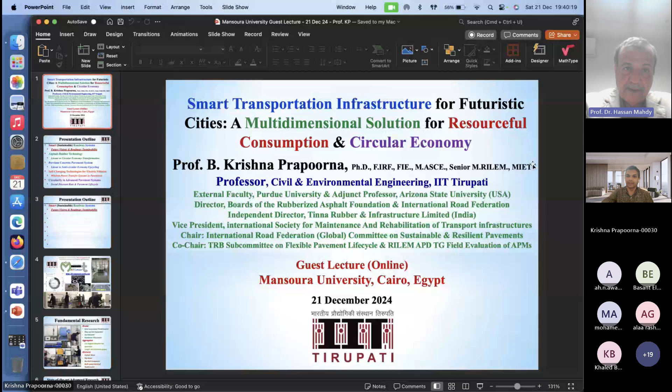So here is the title of the presentation, but then I thought I'll also give you a background about what I did. So I got my PhD from Arizona State in 2008, almost 16 years ago, and then moved to Sweden as a postdoc for about 2.5 years. And then I came back to the US, served as assistant director of the National Center of Excellence on Smart Materials and Infrastructure. That was fully funded by US EPA at that time, and then it became self-sufficient. Later, I even taught a few courses at Arizona State.

Then I moved back to India in 2012. I was with one of the oldest IITs in the country, with more than 15,000 students at one time. And then I got my promotion, tenured, and then moved to the current IIT, which is called IIT Tirupati. So this is one of the 23 IITs that we have. They're all sister IITs, all similar ranking and excellent facilities that we give to the students.

But I also have been associated with two other universities in the US, one Purdue as an external faculty. We have a large project with Purdue University, and then Arizona State as well, where I've been working as an adjunct professor. So there is a project that we have, and I'll explain how we have embarked upon it, and what we do with both of these universities in terms of transferring the technology and whatnot.

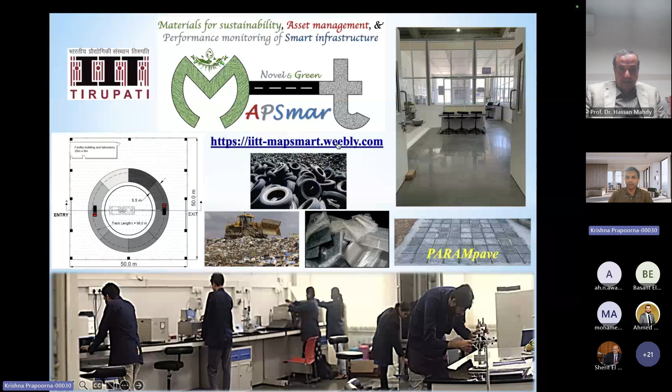As I told you, we do a lot of fundamental research on binder, aggregates, mixture design, balanced mix design concepts. We also do advanced research using the UTM, Universal Testing Machine, and I'm sure many universities in Egypt also have this system. We do a lot of work on performance monitoring and performance criteria development using advanced technologies such as SuperPave gyratory compactor, apart from the Marshall mix design that's been around for almost 100 years.

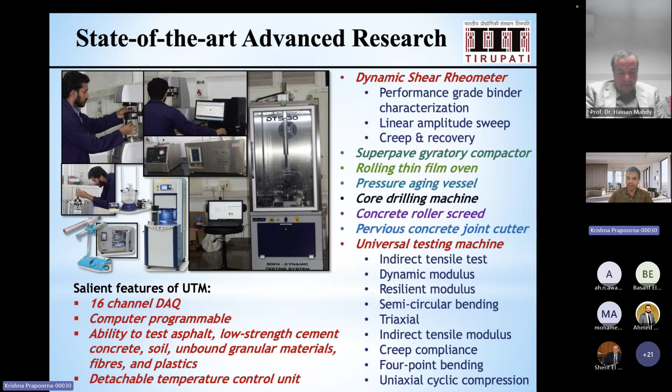So we have a machine that can do everything at one go. We have 2 machines of that kind.

Very soon we will have one more coming up. So this is the ongoing research activity. We are coming up with mechanistic pavement design for India, which includes vehicle pavement interaction with real field testing done on national highways in India, coming up with new vehicle damage factors, real truck traffic, and taking into account the loading pattern and the axle distribution.

So all of these we are doing. We recently received another project from the National Highways Authority of India, a Government of India subsidiary, where we are going to build asphalt rubber test sections across India. It's close to a $500,000 project that I'm championing across the country. We will come up with some specifications very soon for AR.

Apart from this, we also work on this warm mix asphalt additive that I'll explain later on. What we do here is reduce the production temperatures and lay down, especially at the plant. Whenever we talk about the fumes emitted at the plant, they're at very high temperatures, very high emission of energy, and the heat that is required. So we are trying to come up with new additives that can lower the temperatures.

Apart from this, we do a lot of work on pervious concrete, as I mentioned a while ago. We have very good collaboration with the state government where I belong, and we do a lot of work on their pavement assets. So not only building, but also managing their assets.

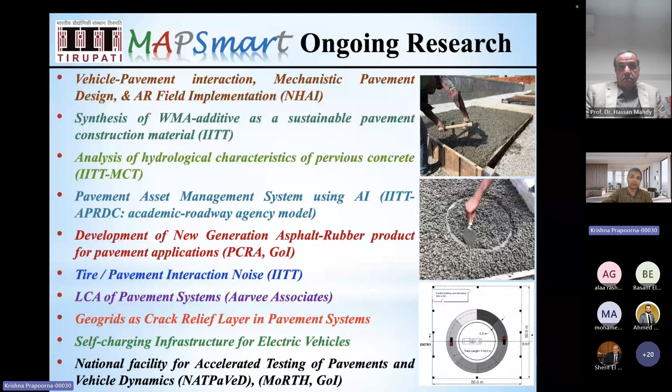And then, as I mentioned, we have an accelerated testing facility coming up on campus. It's a national facility for both pavements and vehicle dynamics. This is what it looks like - it's a circular track. It's now being constructed, so it will get inaugurated somewhere in May or June, very soon.

In fact, we have finished the groundwork, so the track is getting built. Once the track is built, then we will have the real pavement systems built, and then the trucks are purchased. We have 2 real trucks purchased from manufacturers. We have customized them - they'll be running fully loaded at about 18 to 24 tons load. So this is first of its kind in the world.

In fact, I say India, but in the world, because most accelerated testing facilities do a single tire or a dual tire, but we are now building real trucks, both real trucks that will run across for hours together. So we will be able to simulate about 10 years of aging within maybe 1 to 2 years. So that is real accelerated testing there.

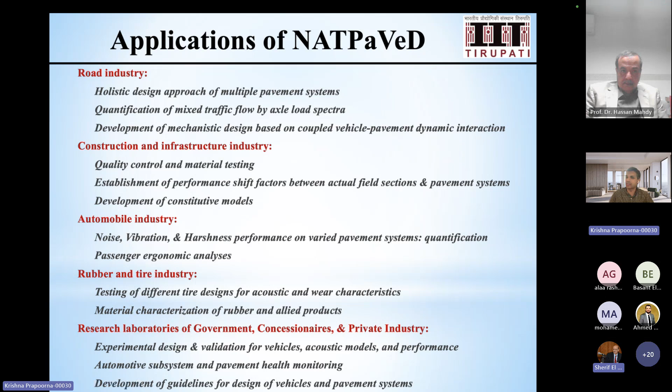That being said, we have a lot of good collaborations with the road industry, construction, infrastructure industry, automobile, because we're also trying to understand the noise, vibration, and harshness. Some of you, if you are from the mechanical engineering background, call this NVH, and that is a very important aspect when you talk about new vehicle manufacture. So we are also working on this to quantify the noise, vibration, harshness performance of these materials. And then again, rubber and tire industry - the tires used in various trucks - is another important aspect, and that is the application.

And then the other aspect which I mentioned with the government - we do a lot of work on this mechanistic roadway design integration with the sustainable development goals. When you talk about vehicle pavement interaction, very few studies in the world have actually taken into consideration the real truck traffic or real traffic, and then monitored the pavement for their distresses and evaluated.

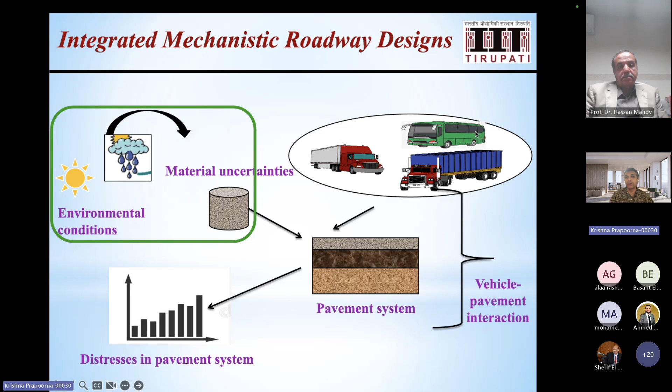So what we are doing right now is we are very strong in material characterization using state-of-the-art equipment. But one thing we are not able to mingle or co-mingle and correlate is the real truck traffic coming into the system, and the sustainability aspect coming with the serious damage occurring on the environment, the economy, human health. So we are now strong in this, but we also have to integrate that with the life cycle aspect - that is another module that I'll explain to you later on.

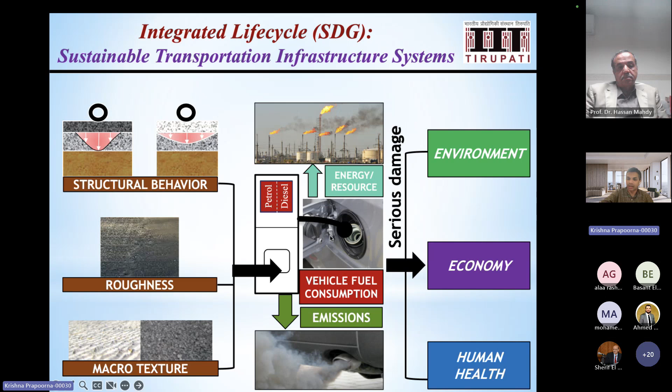When we talk about life cycle, some people talk about 6, 11, or 12 Rs: recycle, reduce, reuse, rethink, remanufacture, and many other things. We've done a lot of work on resource consumption and reduction of natural resources, such as new types of aggregates including tire derived aggregates or plastic modified rubber. We also do work on end-of-life automobiles and composite wastes. So this is our vision from the group, and I'm sure most of you have similar visions.

But if you talk about the current status of the world today, we do recover and recycle, that's called the linear economy, where government funds us to come up with material characterization and development of standards. But what we should be doing, and most countries are at the cusp of, is semi-circular, where we talk about remanufacture and reuse, recyclability, product development, and then come up with EPDs and LCA, life cycle assessment.

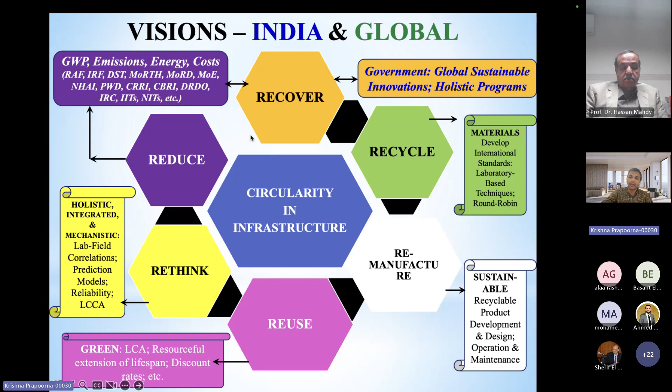But what we haven't been doing is a fully circular economy where we rethink and reduce the emissions and energies that get integrated with the materials aspect and product development. That's where this holistic approach of integration of mechanistic models with LCA comes into picture. That also brings us to the point where LCCA, life cycle cost assessment, gets nurtured. So that's the circularity that we envision through our group, both nationally and internationally.

So the first technical module, I'll not take much time, I'll just go through these maybe 10 minutes each. That gives us leverage to solicit questions from whatever you people can ask me, and if I know, I'll answer, and then we'll collaborate in the future.

The first module I thought I'll talk about is asphalt rubber technology, and it's been very close to my heart because I've been working on this for 20 years now, and I'm also the asphalt rubber ambassador for India through the rubberized asphalt rubber conference group. It has been organizing conferences across the world. It started in 2000 in Portugal, and the next conference will also be in Portugal, 2025 in Lisbon, the 25th year anniversary.

So please feel free to contact me, and we will put you on to the right people. Please also encourage yourself to submit some good papers on rubberized asphalt or asphalt rubber, use of rubber crumbs in asphalt pavements. So that's moving from linear to circular economy.

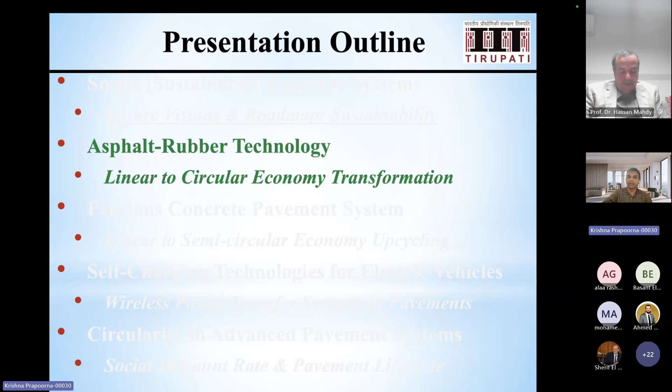How is it transformed? I'll explain this very quickly. If you talk about asphalt rubber, the definition from ASTM, the American Society for Testing and Materials International, very clearly says that when you blend at least 15% rubber with asphalt cement, only then is that binder called asphalt rubber. Anything less than 15% is not called asphalt rubber. Reason being, the swelling of rubber particles takes place very much only beyond 15%.

People have tried 20%, they've tried 30%, and it also gets saturated about 20-25%. That's a magic number. So if you go to Arizona or California in the US, they've also used 20% rubber very much. Florida and Texas, all of these states have used it.

There is another terminology called terminal blend, which is rubberized asphalt, where they blend rubber and replace aggregates with rubber tire crumbs. Please don't get confused: one is asphalt rubber, where you use crumbs with asphalt cement and blend them, that is the wet process, called asphalt rubber. The other is rubberized asphalt, or the terminal blend, where they blend rubber crumbs with asphalt and aggregates, so replacement of some aggregates with rubber. So these are the two important aspects, one is the wet process, the other is the dry process.

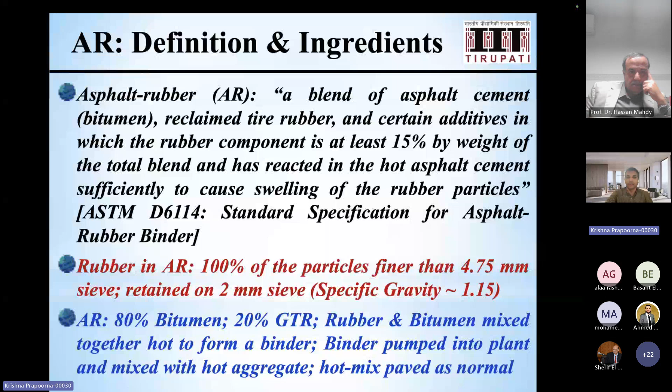That's how these both gel very well with each other. So 80% bitumen or asphalt cement with 20% ground tire rubber is what we call asphalt rubber. They are blended to form a binder and pumped to prepare mixtures. No sophistication required, it's the same plant. I'm sure some of you are familiar with this.

So what are the applications of asphalt rubber technology? One, as a friction course, and as Dr. Sherif rightly mentioned, it was the key thing. That's how the quiet pavement program started way back in 2003 in the US, where they surfaced the friction course on the Portland cement concrete base course.

This is one of the best, or I would say most successful blends, a composite structure where you have an asphalt rubber friction course about half to one inch, which is only about 25 millimeters. It's a really thin friction course resting on the Portland cement concrete, a very strong structural layer.

So that gives us a very good strong base and a friction course that helps drain down the water, and that gives you very good skid resistance, very good noise reducing capabilities, and also engineering use of old tires, because you're using about 15,000 tires per lane kilometer. That's a very good circular economy concept - waste to wealth, that's what we call it.

Apart from these, it's also used in asphalt by itself. So there's a new or existing HMA, hot mix asphalt. On top of that, you provide a gap graded asphalt rubber, a strong structural layer, and then a friction course on top of that. So you see here open, gap, and dense graded structure. Some of you might be familiar with this.

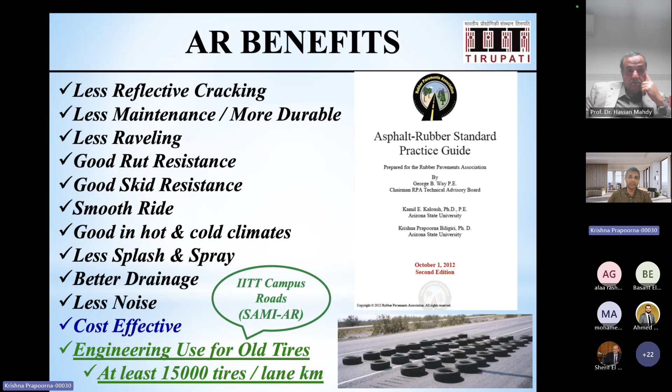We have not seen even one crack in the last 5 years. So we designed ourselves and placed it, did good quality control on these. That gave us good benefit there.

We also talk about LCA of this product, life cycle assessment. I'll explain what LCA is later on. But when we say LCA, that means we are looking at how well this product compares with the other products that are there - the kg CO2 emissions per lane kilometer per year. That is what we look at, the emissions and the energy required to build these.

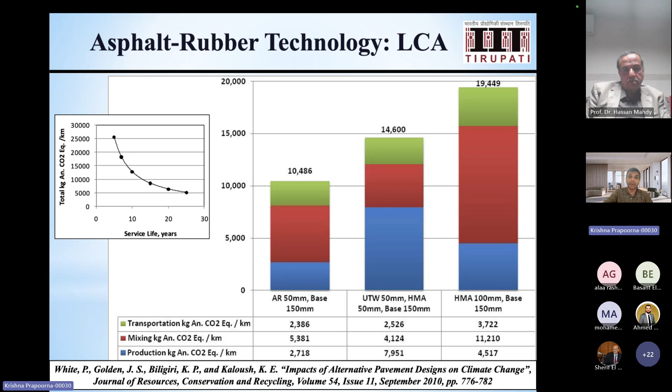One, Veena, she actually worked on a new gap graded mixture design, fully suiting Indian conditions. There are umpteen number of gap graded mix designs across the world, but we wanted to do it for Indian traffic conditions, Indian demographic conditions, Indian geographic and soil characteristics. I encourage you people also to do this. Please come up with your own designs, because if you bring in standards from elsewhere, they may not suit your conditions, especially if you have very high traffic, or the temperature conditions are different.

The other aspect is we also came up with new technology for asphalt rubber, where people have always talked about the storage stability of these products. Can we use it beyond 2 hours of manufacture of asphalt rubber? Today, no, because it gets settled down, so storage issues are there. So we came up with a new product called the recycled or modified asphalt rubber, with various types of industrial wastes and nanotechnology. I'll explain that to you later on.

If you want to read more about this, in one small project with the Government of India, Department of Science and Technology, we came up with mix design practices for asphalt rubber, developed in lines with globally accepted superpave. The first project in the world using superpave for asphalt rubber gap mixes was us. We established our own protocol.

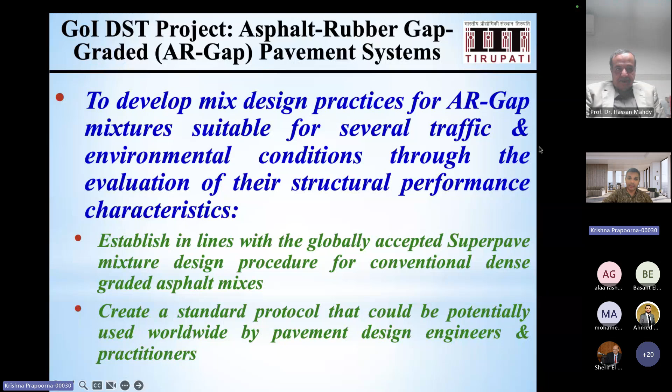Here is the design parameter selection for the entire mixture. We had 20% rubber passing 300 micron sieve, and we used superpave mix design, unlike the Marshall mix design that is conventionally used. The air voids that you see here, you can come up with your own design. When I say this is the design, this is not the end. You can also come up with your own novel design, based on the balanced mix design as well, coming up with performance criteria, including rutting and cracking with respect to aggregate gradation, binder concepts, volumetrics, and many other things.

This is a published document in Construction and Building Materials, a very highly impacted journal.

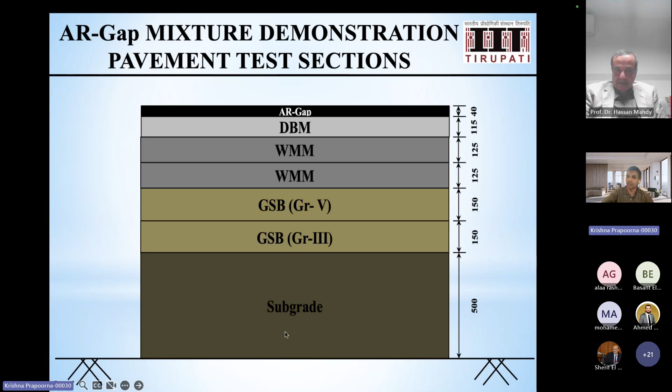We also did a demonstration section, an actual pavement section, where we paved the surface wearing course, 40 millimeters, about 1 to 1.2 inches, on top of the existing sections. There were many layers below: dense graded, wet mix macadam, granular subbase and subgrade existing there. We didn't touch any of those. We just put a small, thin section, constructed way back in 2017. It lasted for 4 years with no cracks.

Later on, the state highway that we paved became a national highway. It was widened to include about 4 to 6 lanes. So they had to repave it, but it was functioning very well.

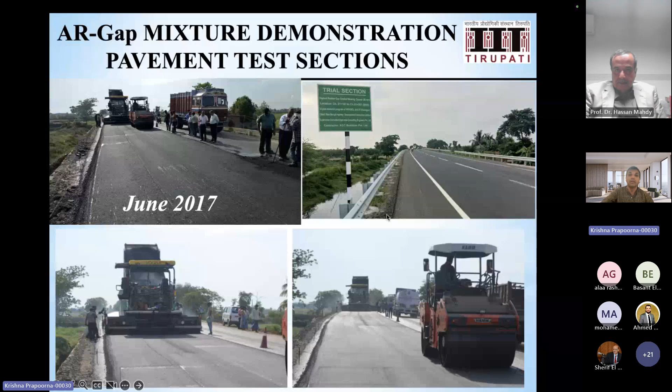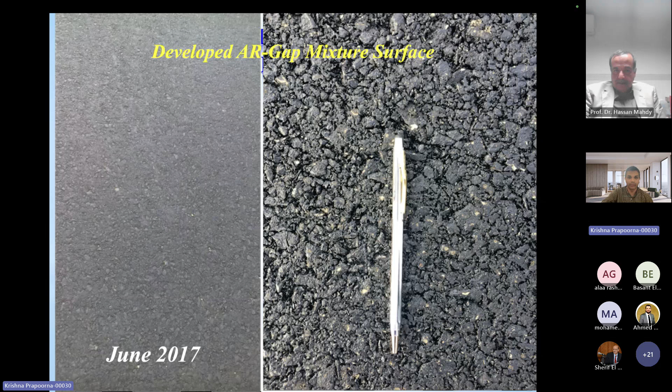4 publications came out of this in 4 different journals, including the TRR, Transportation Research Record, or the RMPD, ASTM, and Construction Materials. In 2020, they actually repaved the entire section.

The other aspect I was mentioning, we came up with this modified asphalt rubber with several nanotechnologies and industrial waste products. What we did to start with is we came up with montmorillonite. Some of you who are geotechnical engineers might be very familiar with this. It's a nano clay, very much abundantly available on Earth's crust. You take that, obtain it from the soil subgrade, and start using it to create modified asphalt rubber.

How do we do this? There is a process, it's a published document, I won't go into detail, but what we do is pulverize the asphalt materials that are activated. We have these rubber crumbs that are blended with asphalt cement at varying dosages. Here you see there's a base binder and then crumb rubber. Based on the ASTM, about 20% is what they are stating for an asphalt rubber.

We even went to about 46%. In fact, recently one of the papers we published had about 60% rubber content. So you can go up to about 60% rubber now instead of just 20%. That means you're now getting into the circular economy concept.

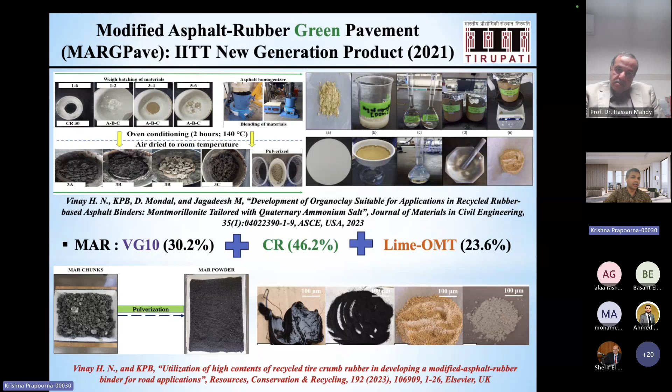And now we've also gone into another stage where we're replacing the montmorillonite with fly ash, pond ash, ground granulated blast furnace slag, and many other industrial wastes, including composite waste.

So what we do here is very simple. If you go to the plant, you don't have to change any of the structures there, nothing required. It's simply a dry process where you have the MAR, that's our product. You simply dump it into the pug mill in varying proportions, and you still run the other processes as they are. So you have your asphalt cement coming into the pug mill, the aggregates coming in, and the new product being blended with the asphalt cement and aggregates, reducing the fine aggregates with MAR. It's still a great product because we've seen that it functions much better than conventional asphalt rubber in terms of fatigue resistance, rut resistance, and moisture resistance.

It's a published document, please visit this journal and download it. We call this MARGPave, modified asphalt rubber green pavement. We used nano clay and industrial products there. It was a full PhD project from one of my students in the past.

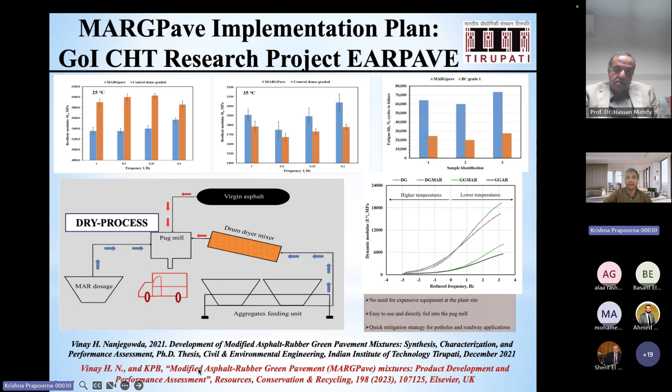We also did a lot of work on LCA, life cycle assessment. Here we use something called attributional allocation at point of substitution. In simple words, how it works: you have three different things—one is asphalt cement, the other is aggregates, and the other is rubber. We combine all of these and come up with what we call the specified temperature and time concept, applied to the binder and aggregates.

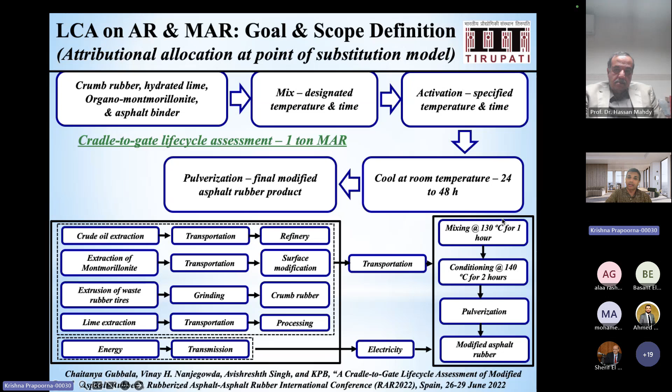We activate that, and then cool it at room temperature, as I mentioned, to get the pulverized product. We take this pulverized product to the plant. We also account for montmorillonite extraction separately, and transportation separately, before it goes to the plant. We do an attributional allocation, which means we don't combine any of these—we talk in silos—and finally the product is compared against what we call the life cycle inventory.

We have primary data coming from material suppliers, such as asphalt cement and aggregates, and so forth. For products not already built, you have to depend on secondary data, especially strong databases like EcoInvent that already exist. That's the literature. And then we have hydrated lime, which already exists—I'm sure it's there in Egypt as well. Then we calculate the material proportioning.

We have done that here. This adds up to 100%, right? And then what we do, next stage is calculate the energy.

So if you want to talk about the LCA, you need a functional unit. What is this functional unit? You have to target an N amount of material to compare this with the conventional product. So what we did here, we compared 1 ton of modified asphalt rubber versus 1 ton of asphalt rubber product, and then 1 ton of the conventional. So that is the functional unit per lane kilometer. You need to specify this for an LCA to run. Functional unit is very important apart from the life cycle inventory.

So you need to create a life cycle inventory using your primary data source. And if you don't have some of the databases, please rely on a very reliable database such as EcoInvent or some other. Run it through a software, or you can create your own LCA package, which we did, in fact. And we calculate the energy coming out of these.

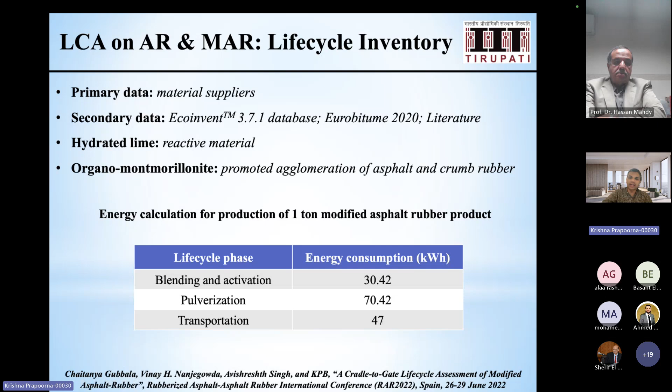So basically what happens here is when you run it through a software, it'll actually ask for all of these. Now, let's say you create your own LCA package, then you'll basically see that you don't need to even include the transportation sector, right? So you can run it through various other types of assessment methods. In fact, we use midpoint impact here, but there are other types such as the endpoint that also can be used. Only make sure that you know the endpoint as well.

In our case, we did not know that, obviously, because we were looking at the cradle to gate, or what we call the production to plant level. If you want to compare this with the operation and exhaust phase, then you'll have to be using the endpoint, which we couldn't do because of our own limitations of still producing the product.

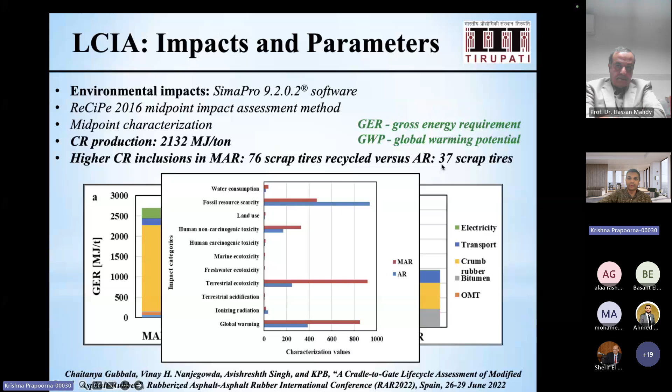So what we have been able to clearly state with our studies, we have found this, we have concluded, inferred that recycling of rubber definitely yields in a very sustainable development of the infrastructure.

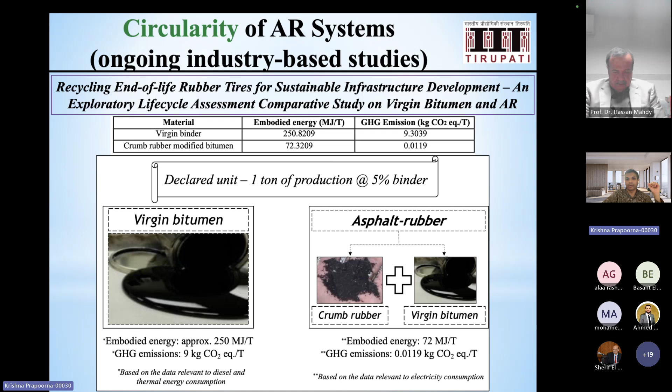Okay, the next module that I thought I'll talk to you is the pervious concrete. Again, this particular product has been there for almost 40 years. Various countries have used this, New Zealand, Australia, Canada, US. But what we thought, we'll develop our own product for India. So when I came back to India in 2012, we said we will embark upon a project called Pervious Concrete for Future Cities.

This is a product that could be used to ameliorate the problems that are coming from the infrastructure. For example, when you have rapidly developing cities, I'm sure Cairo is also rapidly developing with urbanized setup, what happens there is with pavements, it becomes impermeable. So there's no way that water gets percolated through, to the groundwater. That means you also have a little bit of groundwater recharge getting reduced. Over time, quality of life also gets reduced.

So there are two aspects that comes with this. One is the change in the urban hydrological aspect, where you don't have good groundwater recharge. The other is the temperature increase. So if there is an impermeable structure, there is also this heat that develops within the city. And I'm sure you'll experience this with respect to the rural setup.

So when you go out of the city, you'll see that there is about 2 to 5 or maybe even 10 degrees Celsius decrease of temperature with respect to the city, right? And that's called the urban heat island.

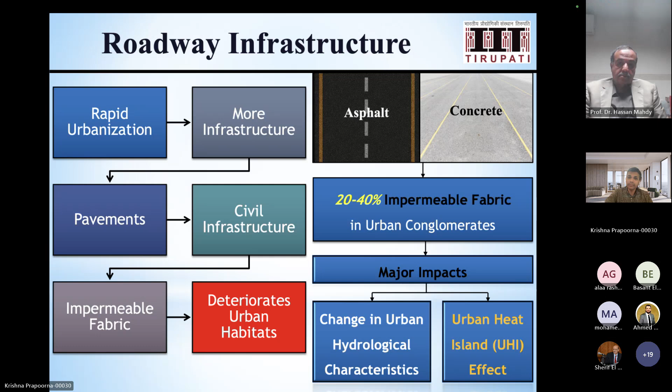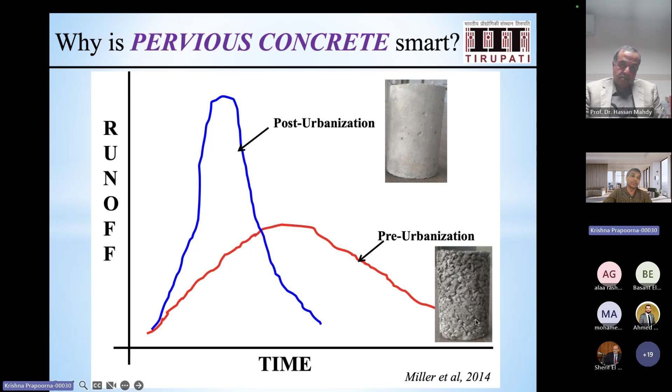So if you want to target both of these at the same time, you'll have to create something called the sustainable urban habitat, or what we call a pre-urbanized setup even after construction of the roads. Better recharge comes with pervious ground, reduced recharge with built up area. So what we should be doing is target a pre-urbanized setup with good green products such as pervious concrete. Pervious, when I say, means permeable in nature, and that gives you a pre-urbanized setup, meaning you have very good groundwater recharge and also reduces the urban heat island effects.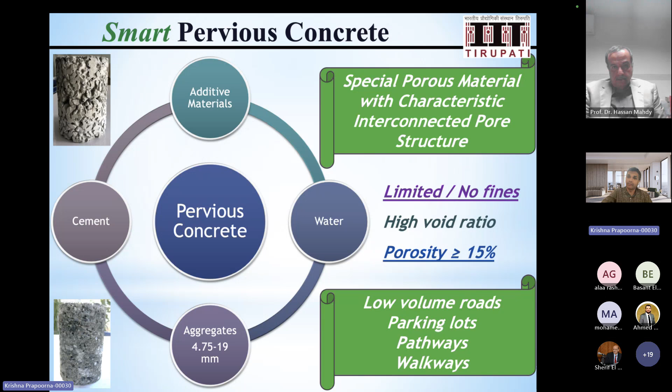So what is pervious concrete? In a nutshell, it is simply regular concrete, except that you have very less amount of fines or no fines at all, absolutely no fines. Very high void ratio, very high porosity, about 15 to 20%, maybe 40% sometimes. Same cement, water and aggregates that you use. You might start using additive materials such as supplementary cementitious materials, example fly ash or silica fume, or maybe GGBFS, rubber granules to increase the strength of these materials, because it has very high void ratio.

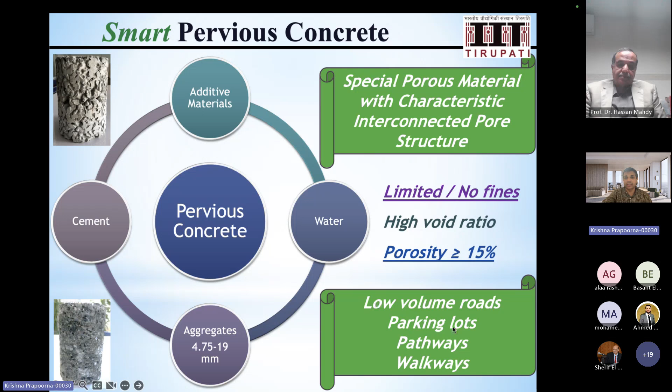You can also expect that these materials are low strength because they also have interconnected pore structure. So what we have seen is this can be applied in low volume roads, parking lots, pathways, and walkways.

So that question always remains - how do we mitigate that? So if you have a composite structure, you prepare this in 3 or 4 lifts, you can start removing the top layer and then replace it with another layer over time. We have seen that these materials get clogged only once in 3 to 5 years, not less than that. So if you can prepare a top section with pervious concrete, and also below layers with pervious concrete, you can start using double or multiple layers. Only the top layer will be removed every 3 or 4 years as a maintenance strategy. So that is another way of dealing with clogging.

So here is one state-of-the-art review paper on pervious concrete. Please feel free to visit this. Another paper also on pervious concrete that talked about clogging effects.

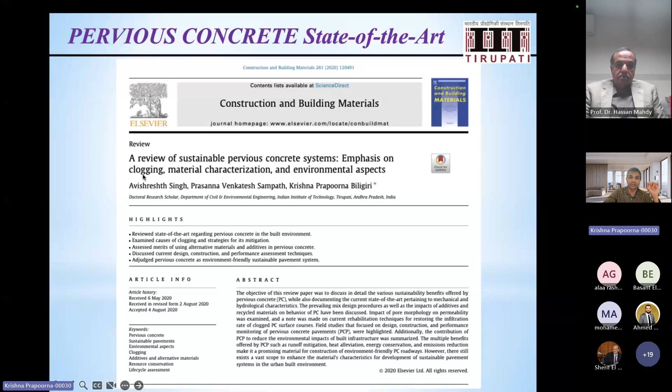So the previous paper had my student here. He's now a professor in one of the other IITs. Avishreshth was my previous student, one PhD. Now he is in Netherlands working as a postdoc in TU Delft. Both of them worked on this for the last 10 years.

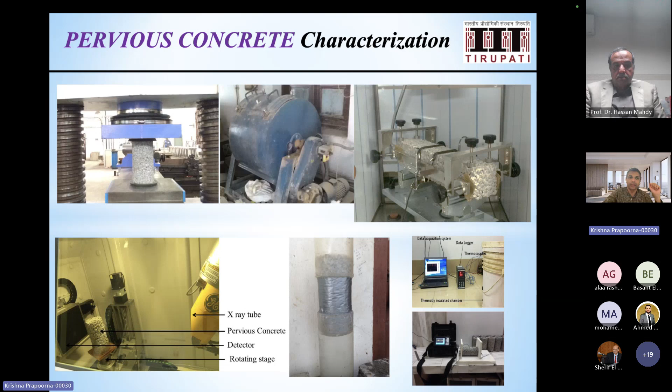So we have done a lot of work on this compressive strength. In fact, we did a lot of work on flexural stiffness. We have done work on thermophysical properties such as specific heat capacity, thermal conductivity, X-ray microtomography, permeability, and many other things. In fact, we've also done abrasion resistance to understand the raveling aspect.

Okay, so here is a glimpse of what all we did after we came up with the product. So we built 3 different sections: one low volume roads, parking lot, a real road with 30 slabs, and then another parking lot on campus IIT Tirupati. All of these 3 sections still exist even after about 6 to 8 years now.

Okay, so what we did, you see here, the mix design composed of cement, aggregates, and then super plasticizer to make sure that there is good workability. So the compressive strength varied between 10 and about 20 MPa. So M10 to M20 concrete is what we targeted for low volume roads. But the infiltration, or what we call the permeability, was very high. If you talk about these numbers, they can be translated to about 70,000 millimeter per hour. That's the permeability that you get with these kinds of products, but they recharge the groundwater very well. They are also very strong for low volume roads - you can run even a JCB on these.

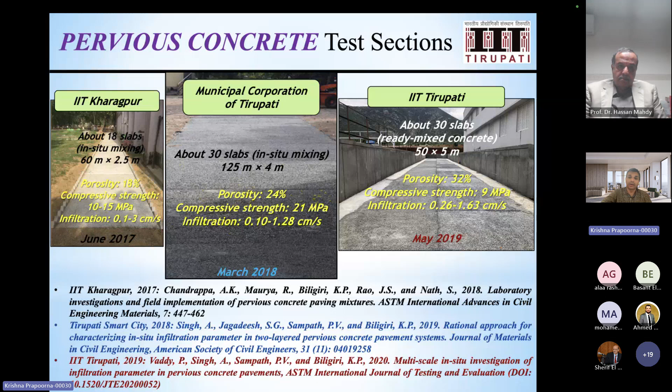In the next stage, people started to question us. Oh yes, it gets clogged, but it cannot be used as a high volume or medium volume road. So what do we do? So we came up with new technology, what we call the PARAMpave.

It's a pervious all road class, all weather, multi-layered paver block. So these are paver blocks, 1 foot by 1 foot, so 300 millimeter by 300 millimeter.

So what we did here, we created 2 holes in a concrete block. It could be M70, M50, whatever you want. If you want M50, you manufacture the base with concrete and then impregnate this small portion with pervious concrete. So here, this is a 90 millimeter height concrete block that you create using a mold, a square mold.

Impregnate this groove with pervious concrete, and these holes also are filled with pervious concrete. That is something you want to be aware of.

Now if you ask me, can we have more than 2 holes? Well, 2 holes are sufficient to ensure good permeability. But lately, my other students have started working on different designs of holes, maybe 3 instead of 2, or 4, or different types of designs. We have also worked on numerical modeling and come up with different designs which we can share with you in the next 6 or 7 months. But overall, you need to create a base with regular conventional concrete and impregnate that with pervious concrete.

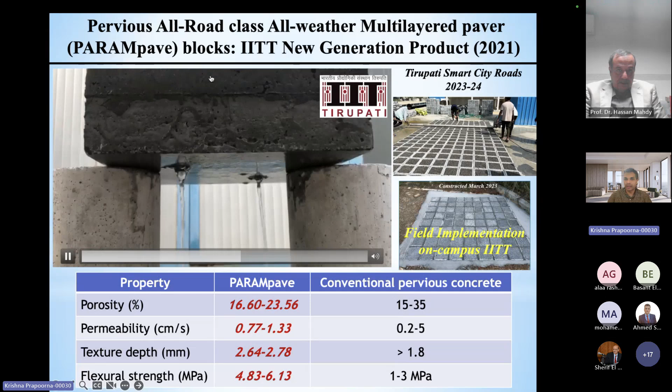We get very good porosity, no compromise on that, anywhere between 16 and 25%, very similar to conventional pervious concrete. The other advantage we got was the flexural strength increased by about 3-fold. Why is that? Because this pervious concrete doesn't have a concrete base, it's regular pervious concrete.

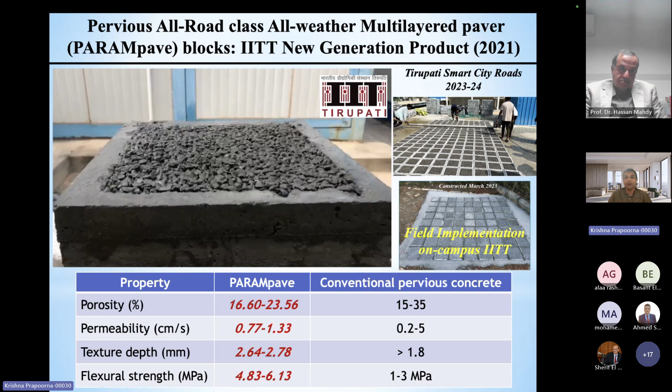It's a slab, 500 millimeter by 500 millimeter, or maybe a 2.5 by 3.5 meter slab that you regularly construct. You construct a concrete section regularly, no, you don't want to do that. You want to create a pervious concrete block, that's called the PARAMpave. So we get very good flexural strength, about 4 to 6 megapascal beyond what the ACI, the American Concrete Institute, prescribes.

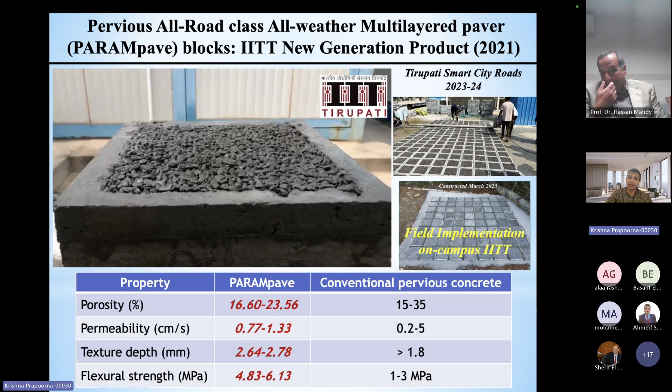So what we did recently, we constructed 850 meters of smart city roads with our blocks, as you see here. And we also calculated the cost savings coming up with our paver block, about 10% cost savings per block. You save about 5 units, I'm putting it in Indian rupees, but you can calculate that in dollars or your currency. It's not very far, about 10% cost savings.

And also it's lighter, about 2 kilograms lighter than the conventional concrete block. The costs have been calculated based on linear lane kilometer for a 3.5 meter wide section. So you're looking at about 200,000 Indian rupees saving per lane kilometer. Approximately, if I calculate that, about $3,000 a lane kilometer in savings. That's substantial.

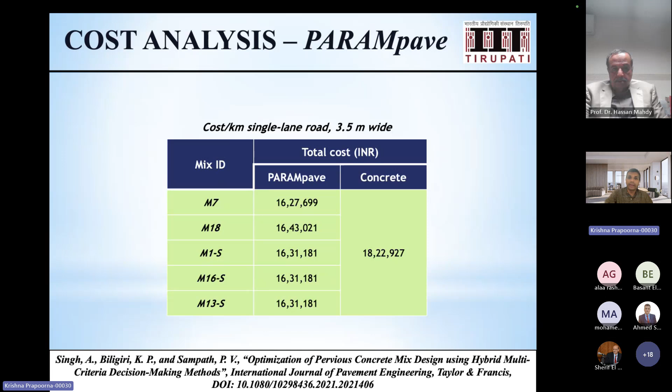Really big savings coming up with these products. It's again a published document in the International Journal of Pavement Engineering. And then I'll share with you one small video of how we did this construction. Let me explain this, maybe with the audio.

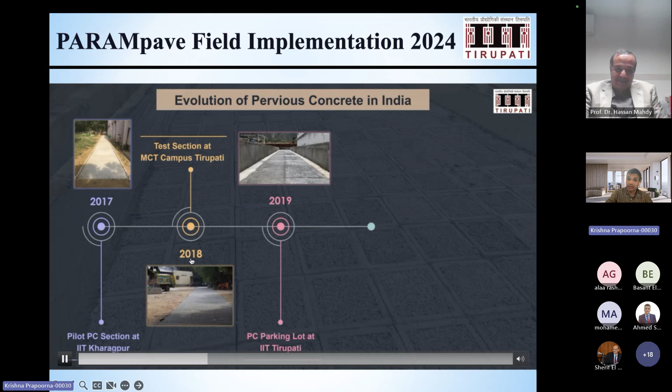So this is my office. I'll just move this and explain to you. I had one of my PhD students and one of my master's students working on this. So we had 4 sections built, one in 2017, one in 2018, one in 2019, and then recently in 2023, just last year, early this year as well.

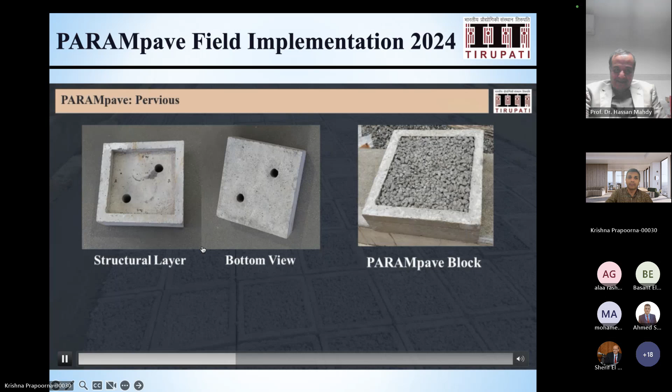So what we did, again, structural layer, bottom view, block with impregnated with pervious concrete. So this is the structural layer, and this is the functional layer with pervious concrete. So we did a lot of survey on this. We prepared the subgrade and a base course with a granular base course there.

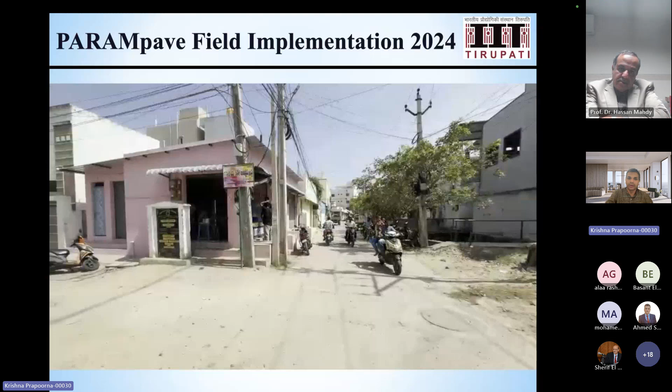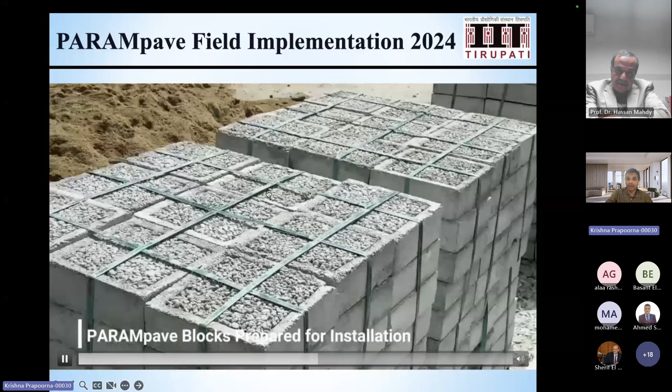It was continuously with traffic, and then we compacted the base layer with a roller. We had about 18,000 slabs that we created in our yard. We brought it to the site and started simple laying, one next to the other, as simple as that. They all get locked with each other.

Our contractor was very happy because we could finish the entire thing in one day. And then you see water being splashed, no water remains on the surface.

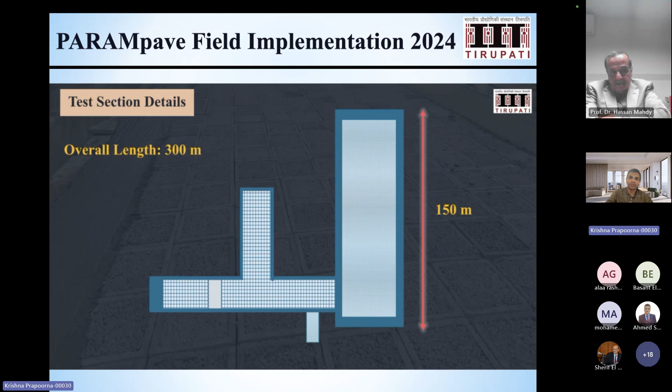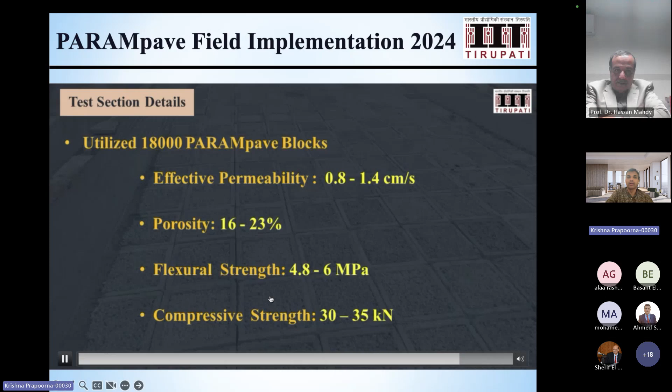So you can see here all kinds of traffic run - a 300-meter first section, and then another 550-meter section later, so 850-meter total. Here is the texture - we had 18,000 slabs, 0.8 to 1.4 centimeter per second permeability, very high porosity, very high flexural strength, very high compressive strength, about M35, M40.

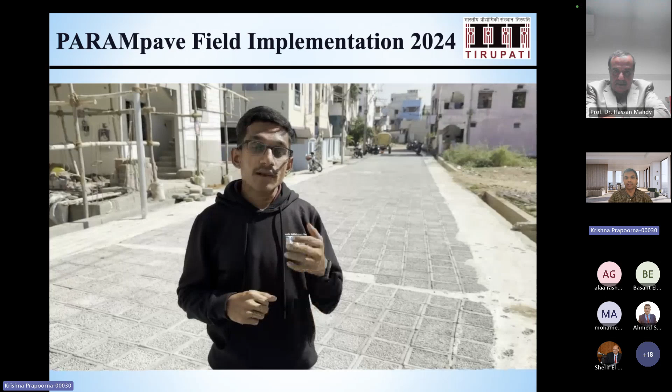We also instrumented these sections with thermocouples. We are now monitoring these sections for their thermophysical properties. This is the laboratory permeability apparatus that we created - there's no ASTM standard, so we had to do this ourselves.

We also had the municipal corporation helping us - they supported the entire project and we spent quite a bit on it. If you ask me, the cost savings are about 50 units per block, including construction. We only spent very little on the construction aspect because the blocks were very cheap.

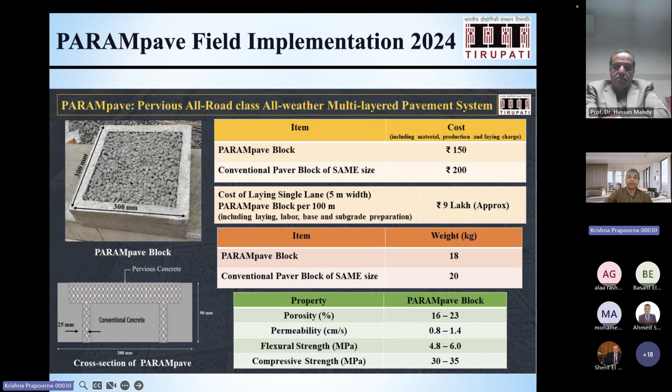Here is, in a nutshell, what it does. We did a lot of work on the life cycle, from material extraction to end of life. The life cycle includes the raw material extraction phase, material processing, and third, the product development phase - that's much more important than anything else. Then the product use phase, where you monitor performance, see if you need rehabilitation or routine and preventive maintenance, overlays, and so on. Once the design life is complete, that is called the end of life.

We might even be able to reuse that. In a linear economy, at end of life we cannot reuse. In a semicircular economy, we don't need maintenance but can possibly use the structure again. In a fully circular economy, every stage can be used - that is where we should be leading to, right?

So, waste to wealth - we did a comparative life cycle assessment study. We calculated the embodied energy, kg CO2 equivalent, and also the capital cost. We used something called cradle to gate, where we manufacture and leave it at the plant level or maybe at the field level.

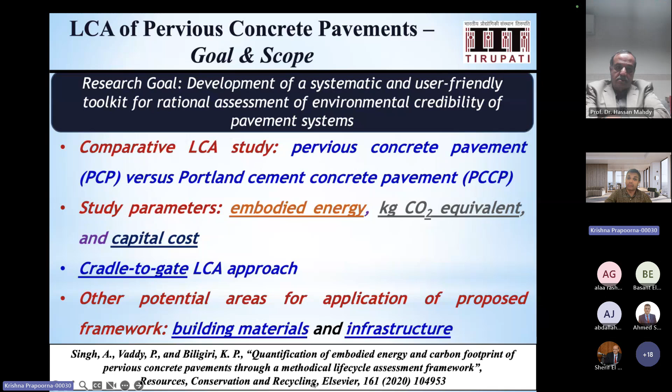This kind of study can be expanded even to other structures - don't get me wrong, it's not only for pavements, but for any structure including buildings, bridges, etc. You can use our framework - it's a published document. We quantified the embodied energy for pavements; it's published in the Resources Conservation Recycling Journal. Please visit this, and if you don't get it, let me know - I'll share it with you. The framework was developed by us in simple MS Excel; we didn't have to depend on licensed software.

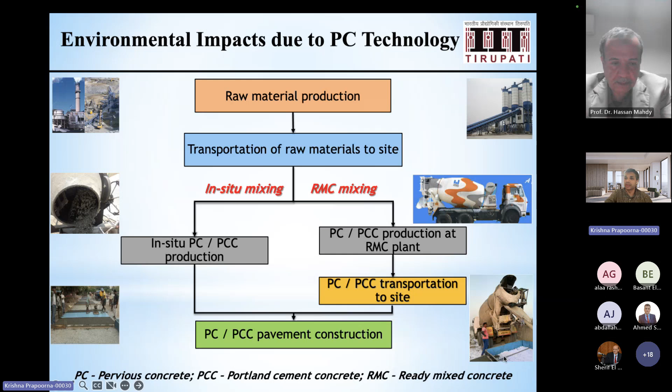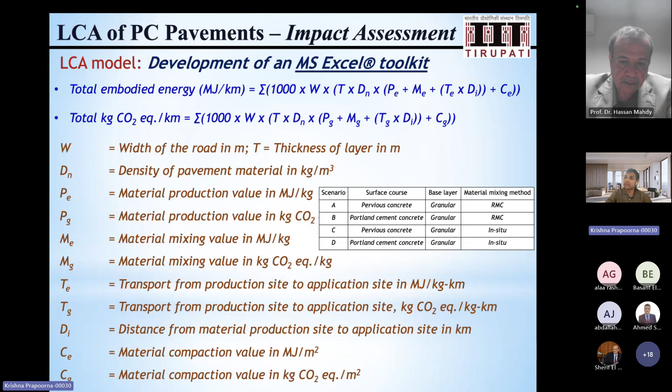We did an environmental impact study between in situ preparation versus RMC, ready mixed concrete. We found that with the models we developed using MS Excel for embodied energy and kg CO2, we can now look at the materials aspect, production, transport, and also end of life. It's a very comprehensive toolkit we developed, comparing between different types of materials.

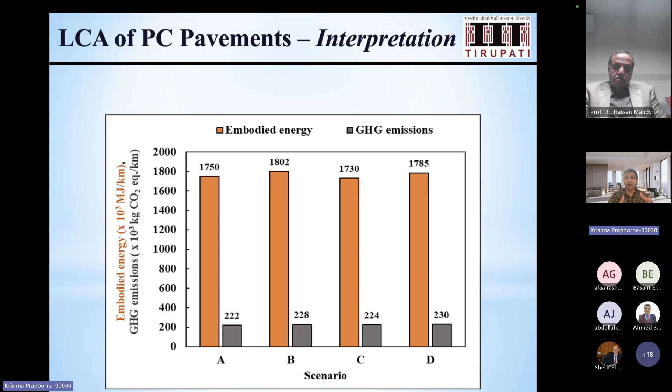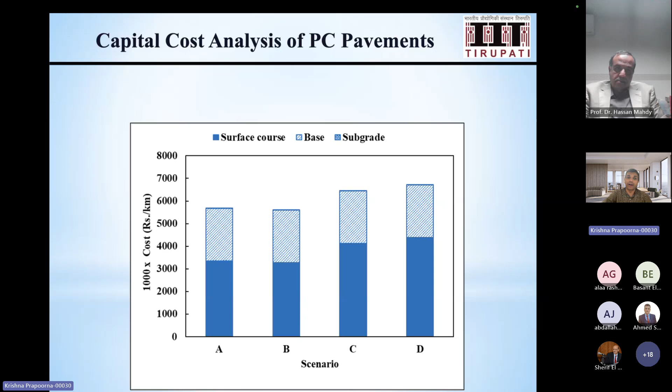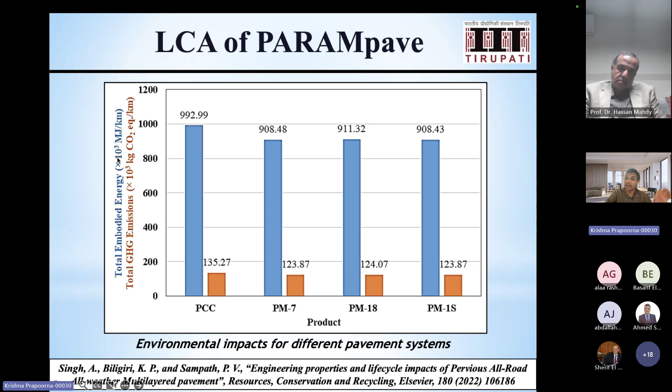We've also done this with respect to regular cement concrete - this is 10 power 3, so make sure it's 90 times 10 power 3. That's the reduction you get, substantial. So high strength with our new product, less material requirement, less energy, less emission, lighter, and also cheaper.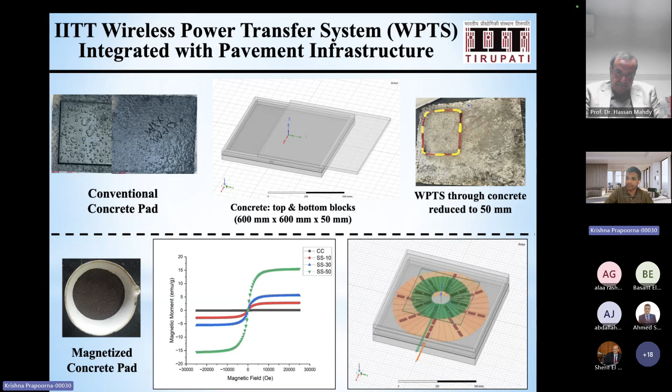We've also calculated the power efficiency of these coils. We see that if you can magnetize this concrete with, for example, steel slag - this is the product we are developing right now, steel slag concrete, about 50% replacement of cement with steel slag - what we can expect is a very high magnetic moment.

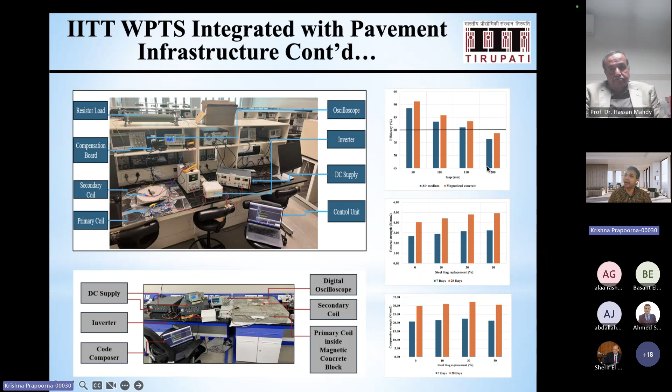This is our lab setup. We have now calculated the efficiency to be about 85 to 90% higher than regular conventional concrete. So what we did, I'll show you now a video.

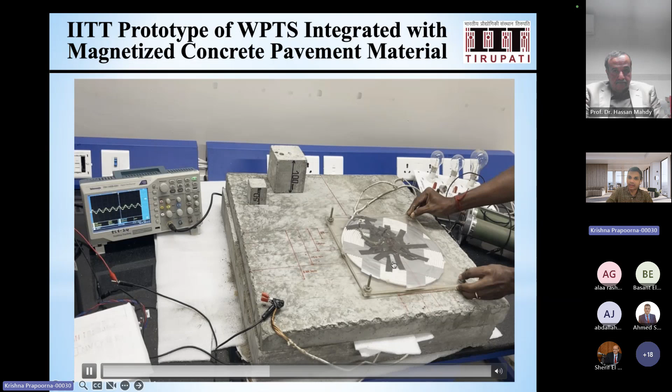So if you want to create a 50 millimeter slab here, and then embed these slabs with primary coil - this is the secondary coil within your electric vehicle. Now I'm going to move it up. You see here, it can go up to about 200 millimeter distance from the coil.

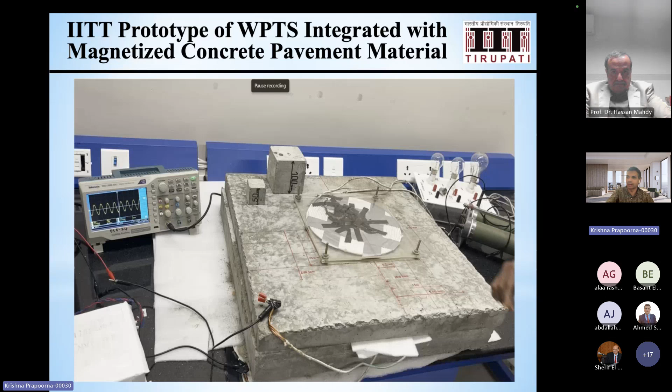So if you have an electric vehicle that has a clearance of 150 to 200 millimeter, your primary coil will start charging your secondary coil embedded within your electric vehicle. So it's a self-charging infrastructure - you don't need a separate infrastructure. You can have your roads dynamically charged. So that is what we are doing.

We will be having our test section built within the next week. In fact, we have got clearances, so we will be doing that very quickly.

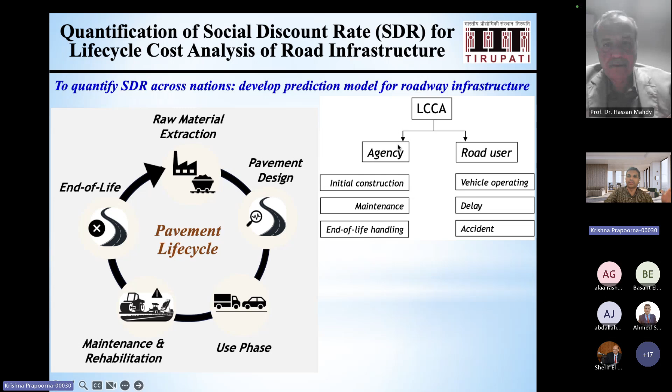Now, if you talk about life cycle cost assessment, that brings in other aspects such as construction, maintenance, vehicle operating costs, delay and accident. So there are two aspects here: one is the agency cost that takes care of construction, the other is the road user cost that takes care of the operation phase.

Now, if you combine both of these, you get something called the present value over the design life. So what happens in 10 years, we calculate today - that is called the present worth factor. That's the current value of the entire system that remains for 10 to 12, or maybe 25 years, and we calculate the life cycle cost at present for the future.

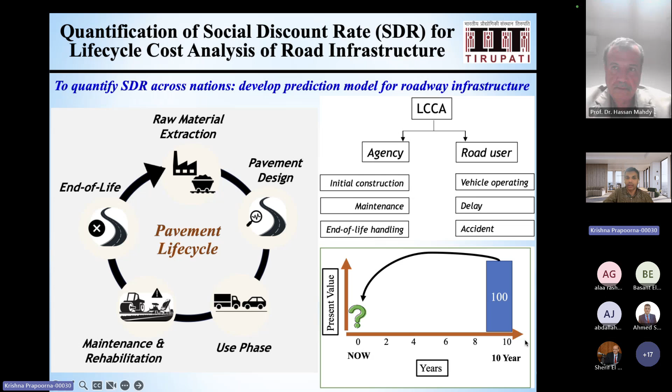And that brings in a new concept: social discount rate. This particular social discount rate has a definition - a very tricky definition, but we can simplify it by saying that if you want to bring down your future costs to present value, that's called discount rate. But if you want to calculate the social discount rate, you'll have to come up with socio-economic factors, social factors, and economical factors, which means your perceptions have to change.

That if I invest today on a larger pavement project at a network level, I will be able to reap the benefits of cost savings over its design life. So your perception should be that I should have a long-term vision of cost savings today - don't look at the myopic vision.

When I say don't look at what happens today, I will only fix it now but leave it at a later stage to be rehabilitated - that cannot work in a social discount rate. So I should be discounting it - that's what discounting is. I should be looking at the cost perception for today's savings. So we did a small work with conventional discount rate for 3 different countries.

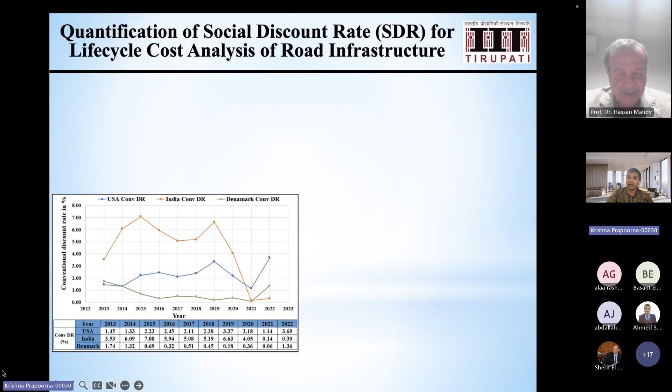So we have data for 35 countries today, all across Europe, India, Asia, China, and many other places. If you have data, we'll be happy to work with you closely.

So if you talk about conventional discount rate, you see the numbers are very high with respect to developed countries. We are emerging economies, so our numbers will be high because we look at today's savings and not worry about later. That is the perception that we have.

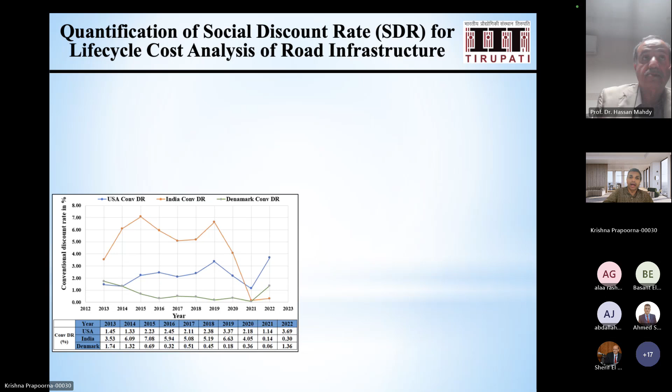Now if you talk about the social discount rate, I will be looking at prioritization of savings, investments for future consumption. I will also take the risk but avert it by making sure psychological biases are not in the picture at all, meaning my visions are long term. I make sure my savings today, that I invest more, are savings for the future. That is the overall social discount rate.

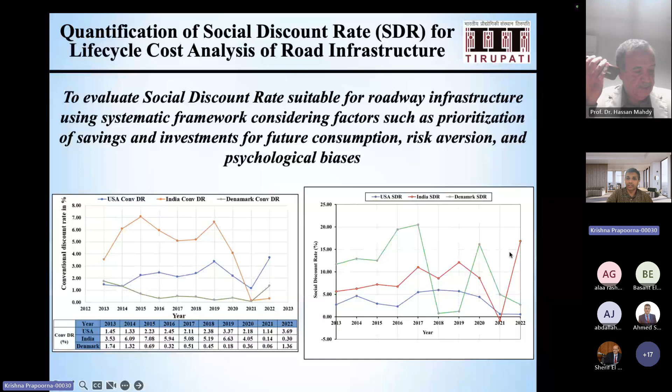And you see here the numbers are coming down. These are realistic numbers, based on actual values that we got for various countries. And again, we have data for the others.

In a nutshell, why do we have to transition from conventional discount rate to social discount rate? For pavements in particular, because we are looking at societal preference, economic factors, and demography. So I look at how many people are going to live for that number of periods. That brings in the demography.

In terms of pavements, the same analogy works. How many years does my pavement last before it dies down or fails? Second, how much do I invest today, not for the immediate gains, but for the future benefits?

So I prioritize. Developed economies have always been doing this - prioritizing future benefits over immediate gains. That is the societal preference.

So determination of social preference brings in the risk perceptions also into it. And we look at the socio-economic conditions between the emerging economies and the developed countries.

If you look at the return for investment, so I want to get more than what I invest today, then you get a higher discount rate. But the US or developed economies get a lower social discount rate because they've already prioritized. The depreciation will be very high because I look at societal preference.

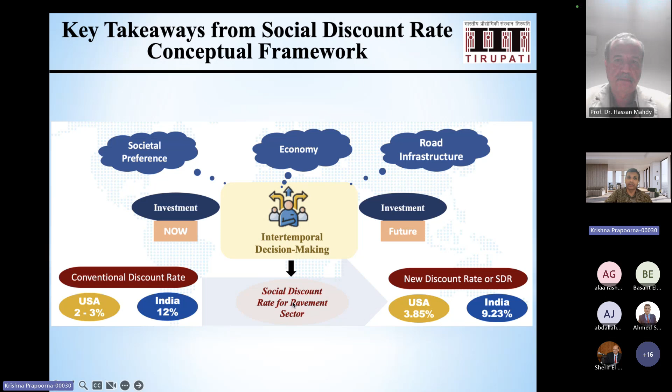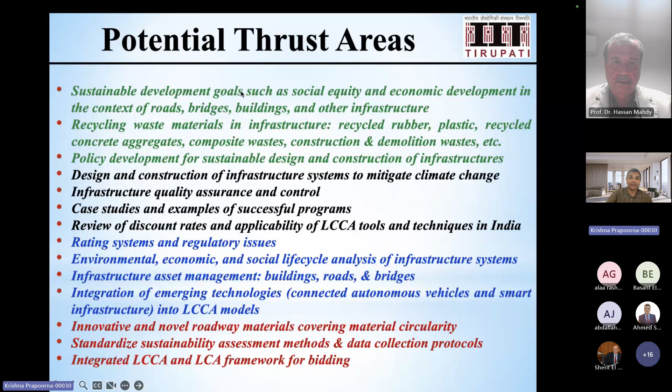So with this, I end my presentation, and sorry for taking about 5-10 minutes extra, but I thought I'd explain to you the social discount rate and where we have to be heading towards.

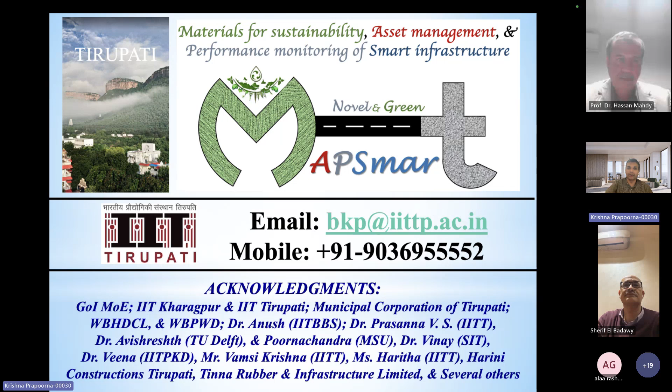And this is how the city that I live in looks like during deep winter, but we have very good greenery around. Thanks so much, and I'll now stop sharing and solicit questions.

Thanks so much, Sherif. Krishna, thank you so much for this very interesting journey through your recent research. Actually, what you're doing is really very trendy and very beneficial for your country and the whole world as well. I personally learned from some of your research work here, and we maybe benefit in Egypt from what you have presented, and I guess Dr.

Hassan will share with me, because lately we are experiencing a very high price of bitumen, which makes it really harsh on the country to establish new roads or to maintain existing roads, and we are looking for different alternatives. Not only from the environmental point of view, but also from the economic point of view, we face a lot of economic crisis, and we are looking for different alternatives.

So what you have presented about the pervious pavement, I have a question regarding this, because what you showed when you went to the concrete blocks, and I see Dr. Hassan looking at this point as well, you still have a very good compressive strength for your blocks. So this could be applied for major roads, not only low volume roads or parking lots, as usually when we think about pervious concrete, we only think about parking lots or low volume roads. Do you agree with me on this? Can we use these concrete blocks in heavier roads as well?